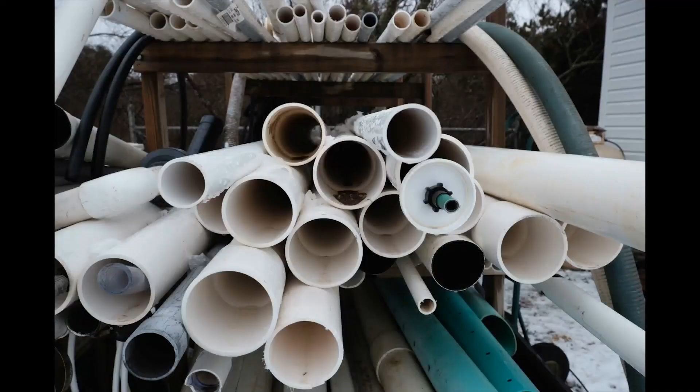Welcome to the Massachusetts Alternative Septic System Test Center, a division of Barnstable County's Department of Health and Environment. MassTC is the nation's premier third-party testing and research facility for innovative alternative on-site septic treatment technologies.

One of the most important ways that any septic system regulation can protect the public health is through the use of setbacks. Setback distances are designed to keep people and water resources a safe distance from potentially harmful wastewater. This training will focus on 5 setback categories: property lines, building foundations, wetland resources, water supply wells, and groundwater.

Our staff sat down with 3 practicing health agents to ask them about some of the details of setbacks in Massachusetts Title V and how they and their boards of health have handled certain situations.

My name's Bob Canning. I work for the town of Orleans, and I've been there for 37 years as its health agent. My name is Jane Crowley. I work for the town of Eastham. I'm the health agent, director of health and the environment. My name's Glenn Harrington. I've been the health agent at Mashpee 20 years, and I was an inspector 4 years before that in the town of Barnstable.

We've got 5 Title V setbacks we're going to talk about today: property lines, foundations, wells, groundwater, and wetland resources. Of the 5 setbacks, which one do you consider to be the most important, and what do you consider to be the least important? How would you rank them?

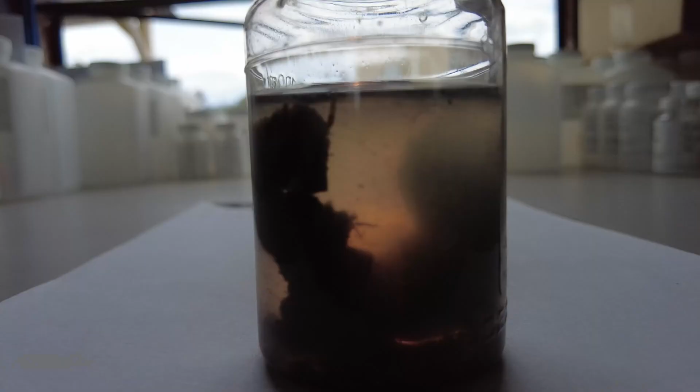Great. And then, so wells are first. What's the order after wells? I would say wetlands. Obviously, we have many sensitive receptors, and wastewater, even a small amount of nutrient loading, has a significant impact. So that is a critical concern in our community. We have many freshwater ponds, we have estuaries on either side. We're surrounded by water. So that is always a very important criteria that we are looking for.

Would it be accurate to say that property lines and foundations are the least important? Yes, I would say so. Clearly, we require, upon installation, a certified as-built with a land surveyor stamp. So the components are identified specifically on the lots. But I would say that of all the setback requirements, foundation setbacks and the property line setbacks are clearly on the lower end of the spectrum.

Because they don't affect public health as much? Yes, I mean, we can waterproof a foundation so that there is not horizontal transmission from the effluent. Property lines, we want to make sure that the effluent is discharged on site.

Also, you have to be considerate of the abutters. I think engineers do that as a matter of fact in their planning process. We don't want to negatively affect other people's site constraints. And by going directly up against the property line, you could create more of a hardship, I would say, on abutters. So engineers do a very good job of trying to stick with the 10 feet and, if necessary, going up to the 5 feet and getting the variance.

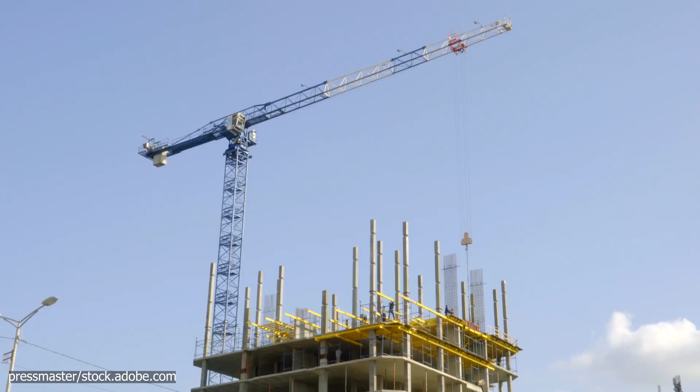So you should have some discretion on granting variances on a repair. Per Title V and the standard of review, you have far less discretion on new construction, and I think that's fine. They're starting a new project, and they would be creating the variance with their project. So I do think that two separate standards of review are a good idea.

I mean, new construction, your goal is full compliance, whereas with something pre-existing, you have to work within what constraints you're given. Whereas for repairs, you'll be more lenient on those setbacks. You just have to work to maximize the compliance that you achieve. I don't think there's any difference in the review, but there's definitely a difference in the mitigation.

Okay, so the standard of review is the same, but the mitigation can be different. Within Title V, there's actually a priority under maximum feasible compliance that the property line setback be requested first. Unfortunately, that doesn't happen all the time because the engineers and homeowners are looking to get the septic system approved and installed, because that variance requires, in most towns, a board meeting so the abutter notification can occur and the abutter has the chance to be heard at a public meeting.

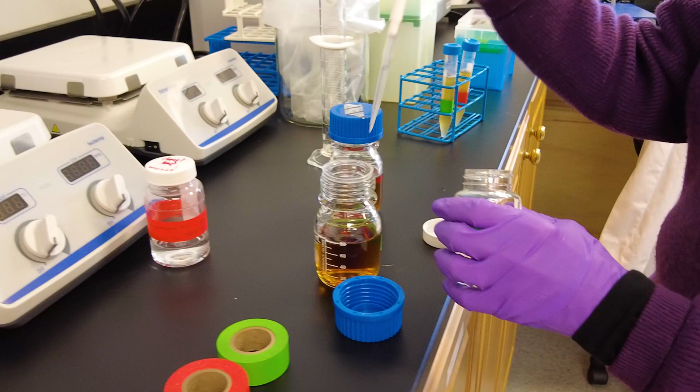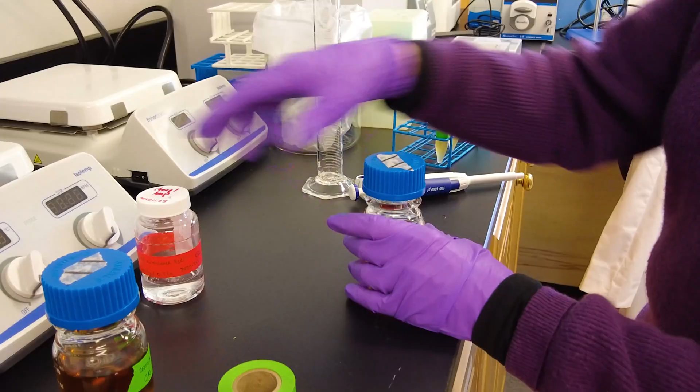So I'm guessing that a lot of your advice to your own board is know their own regulation and base all their findings and their direction on the regulation, not on some inappropriate protocol that was conducted. Right, they have to be careful not to deny things based upon a policy or a submittal protocol. The regulation really has the teeth of the law behind it. We're a science-based operation, so we need to be based on science. I would have to advise any board to work on the science and base their decisions on some study that's considered an industry standard, and not go too far awry from that, because the regulation would be considered arbitrary if it went beyond some industry standard.

What about those situations where you have a homeowner who's next door just doesn't want to see the property go in or doesn't want to see his neighbor enlarge the house? Do you come up with those situations where I don't want him that close to my property line, why should I let this happen, kind of thing?

We have had that situation, and many times there's ulterior motives that go along with that, where on the Cape we have visibility issues where one house is blocking another, and that's probably more where we come in. They use us as a tool to try to prohibit someone from doing that, but people have the right to use their own properties.

Granted, they can't force drainage onto another property, so you have to make sure the engineering and septic design is sound where you're not impacting the other property. But if it's an existing situation, the septic system comes first. You have to have a septic system for a property, and if you deny them that, you're looking at manifest injustice.

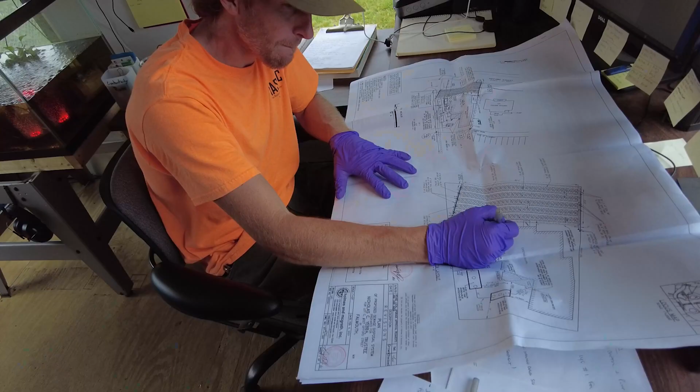So in the instance, say, of new construction, generally what we're looking for is full compliance with the code. And if somebody wants to deviate from full compliance, then they have the variance process to do that. However, in order to get a variance, an applicant has to demonstrate that the design with the variance will provide the same degree of environmental protection as without the variance, and also that denial of the variance would constitute manifest injustice.

Equal degree of environmental protection is difficult, but not necessarily insurmountable, particularly if you're looking at some sort of enhanced treatment system. However, manifest injustice is, I think, a much higher hurdle, because there is case law that has basically interpreted manifest injustice as depriving an applicant of all beneficial use of the property. And all beneficial use of the property is very broadly defined, such that if you can derive any use out of the property, even if it's, for example, establishing a birding stand, then you have beneficial use. And denial of a variance does not deprive you of that kind of beneficial use.

So standards for deviating from setbacks, regardless of what they are, for new construction, within a strict reading of Title V, is very, very difficult.

Now, with respect to the philosophy behind some of those setbacks and the reasons why they're in Title V: property line setbacks generally require a component to be 10 feet off the property line. Basically that is to ensure that there's no accidental encroachment of a system component on somebody's property line, and also to ensure that there is always going to be adequate separation between critical components. So if, for example, your soil absorption system is 10 feet off the property line and your neighbor's soil absorption system is 10 feet off the property line, that's a 20-foot separation. That is pretty much guaranteed as reasonable assurance that there's not going to be any sort of interaction between the two, that there won't be any sort of adverse impact because of proximity. That's a reasonable separation.

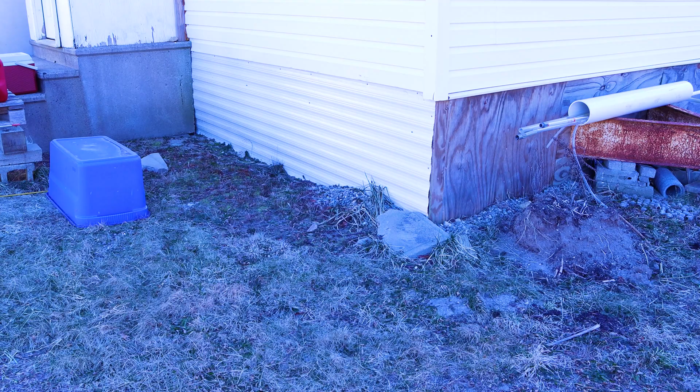Foundation setbacks are in place for a couple reasons. One, that you want to make sure that components are far enough away from a foundation so that if you ever have to go in, say, and replace a septic tank, that you're not so close to a foundation that that kind of excavation would in any way threaten the structural integrity of a building. Another reason, and this would be more applicable to soil absorption systems, is that you want to prevent any sort of horizontal migration of effluent that may get into a basement or any sort of living space.

In the Cape with sandy soils, that's probably not as much of a concern, because the vertical component of infiltration is much more dominant than the horizontal component of any sort of effluent flow. However, if you get into other soils in other parts of the state that may be more platy, then that horizontal constituent of infiltration may be more dominant than the vertical, and therefore you want to ensure that there is adequate separation so that you don't have any sort of infiltration into any sort of living space or basement.

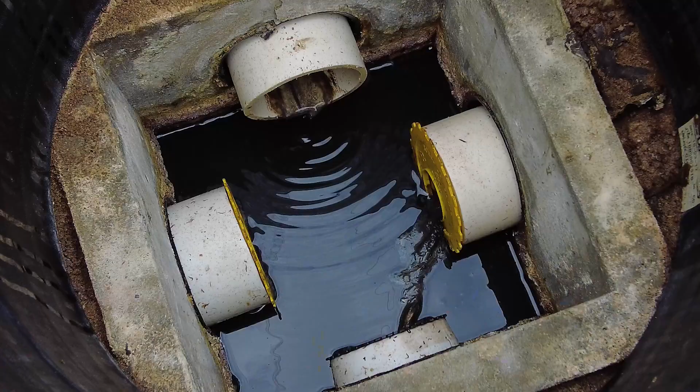And through the years, the existing 20-foot separation, say from an SAS to a foundation, is considered adequate for that purpose. And the 10-foot separation, say from a septic tank or any other chamber-type component, is sufficient for protecting the structural integrity, as we had mentioned at the beginning. So that addresses property lines, and it addresses foundations. I think another one that you were looking for was wetlands.

Yeah, wetlands and wells. But before we leave that, I've heard you refer to the other two as more administrative ones, that in repair situations are less critical. Could you speak a little to that, whether these are what you meant by administrative, or ones that are sort of less important? Well, I think the property line setback, as we said, is to ensure that there is sufficient separation between components of systems.

That is what you could loosely define as an administrative thing. It's not necessarily a critical environmental component, although I don't want to minimize the importance of having adequate separation between components. But that's a way of ensuring it without having to go in and check every neighboring lot when you do a plan review. If you're meeting that separation, then you should be okay.

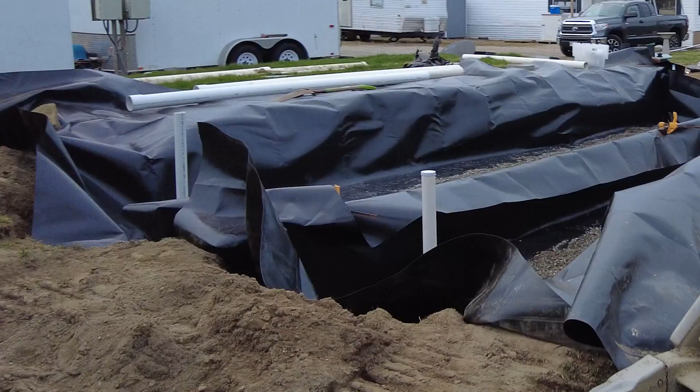But in a repair situation, they usually put up an impervious barrier, whereas in new construction, they could still put up a barrier, but they'd have that other hurdle to go over, which would be the manifest injustice piece.

Right, and with the revisions of Title V back in '95, we were looking to streamline how variances were reviewed and approved, because under the '78 code, we approved all variances, and everything that deviated from the code was a variance. So anything that the Board of Health reviewed and approved as a variance came to us for our secondary review and approval.

So in order to streamline things and keep it more within the local approving authority's realm of responsibility, we came up with the concept of local upgrade approval. Local upgrade approvals, or those things for repairs that are able to be administered under local upgrade approval, are listed in Title V.

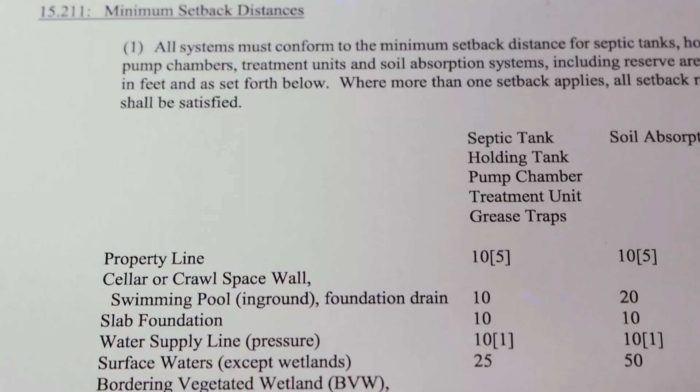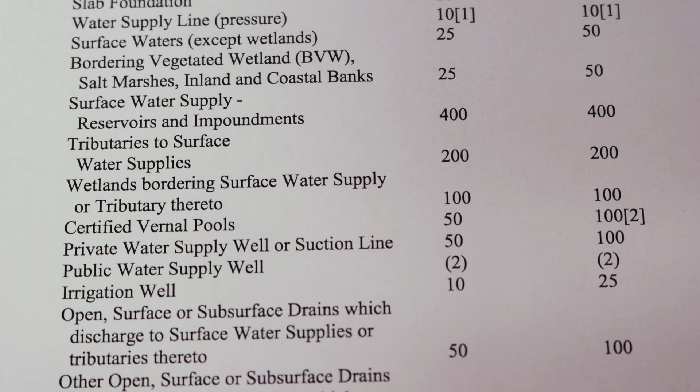And essentially, they are listed in hierarchical order. Those that are less critical are right at the beginning, like property line setbacks, like foundation setbacks. Those that become of greater concern with respect to public health and environmental protection are listed at the bottom.

So basically you're going through this, and then if you can't accommodate a fully compliant system, or a system as compliant as possible with some of - and I use the term less critical very loosely - some of the less critical deviations from the code, then and only then do you start looking at things like reduced separations to wetlands, or reduced separations to wells, or reduced distance between the bottom of the SAS and groundwater, or any reductions to naturally occurring pervious material.

So as we move off of those that are sort of less critical, we get into particularly wells and wetlands. Can you speak a little bit to why you believe those are in the code? What are the critical things that a Board of Health should look at when they're even thinking of varying those, or when they're reviewing plans and things like that?

Well, there are a couple schools of thought with respect to wetlands as to why those variances are there. One school of thought suggests that you're protecting the wetlands from the system. There's another school of thought that says you're actually protecting the system from the wetlands.

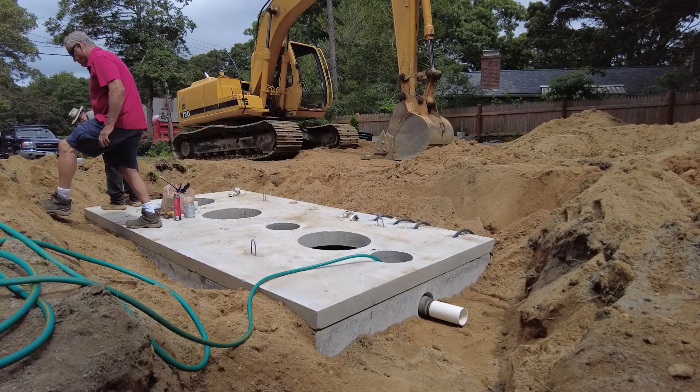And the thing about hydric soils is that they're not as amenable to a Title V system, because they're hydric, they're not unsaturated, they tend to be comprised of much more organic, loamy, silty material than what you would see in more traditional soil horizons.

So there may be an element from both sides in terms of why you have that. You don't want to have a lot of construction and excavation too close to a wetland, where you may be impacting it, so that's sort of a protective element. Depending upon site conditions, you also don't want it so close that you might risk effluent breakout within a wetland.

So in that sense, you're protecting the wetland from the system. Right, and in the other sense, in terms of appropriately siting the soil absorption system, you're protecting the system from the wetlands. So we're both right—it's protecting one from the other and the other from one.

So what about the well setbacks, which are set at 100 feet in Title V, but many towns have gone further than that? Could you speak to why the well setback exists, and if in some sandy soils it might be appropriate to increase that setback? Well, the well setback basically is a public health consideration.

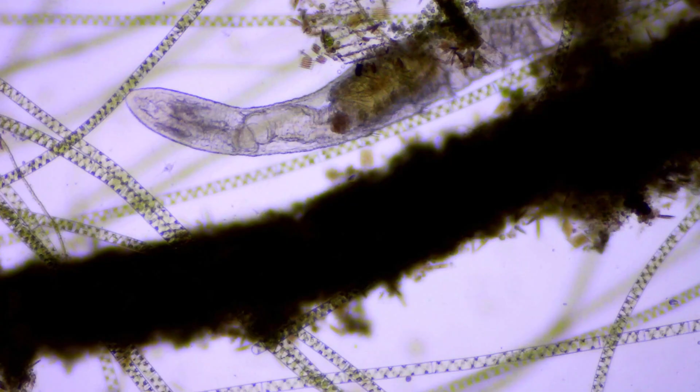I think it's protection primarily from pathogens, whether or not certain conservative constituents in effluent are diluted to any appreciable degree. If a well is immediately down gradient of a plume, that's debatable.

But the 100-foot setback from a well is primarily for pathogens, and that's been borne out. I think, I don't know if this is an apocryphal story or not, but when I first started with the department, the story went that under previous codes, even before the '78 code, the well setback had been 50 feet. There was a Cape town, relatively densely populated, that adhered to that 50-foot setback, and these wells were just popping up with bacterial contamination.

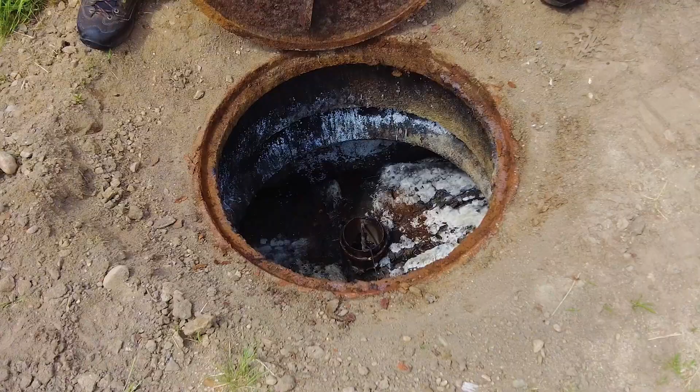That was tied to septic effluent. Now, it could have been that there were a lot of cesspools, so these were overloaded—you weren't getting adequate treatment, you may not have been getting adequate separation, there could have been a whole host of things. But the thing is, that did not seem to be an adequately protective separation, so it was increased to 100.

Over the years, that does seem to have held up as adequately protective for the typical constituents you'd look at, like coliform or typical bacterial tests. I know there's potentially some concern about viral transport because viruses may be able to last longer, but that's not something that's typically tested for. By and large, though, the 100-foot seems to be appropriate and adequate.

So when we're talking about setbacks, those are probably the more important ones—the ones that directly affect public health: viral transport to the well, or surface breakout that might contain viruses, which could then be exposed to anybody walking through the wetland, or pets that go there and come back into the home.

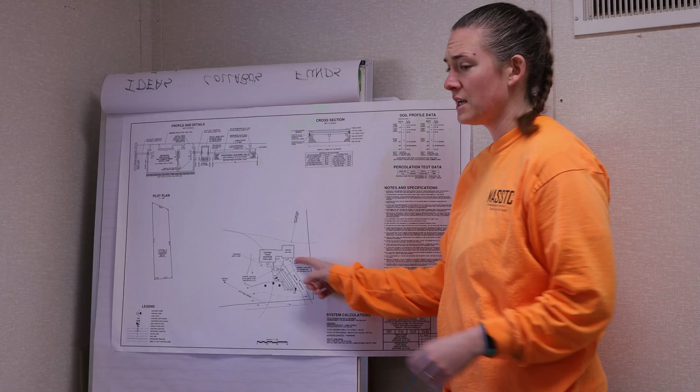Now, with local upgrade approval, the reason we've codified the kinds of reductions allowed is because we recognize you may not always be able to meet the same setbacks on an existing property, particularly one built before the '95 code. The reality is the '95 code requires bigger systems than just dropping a leaching pit in, as was allowed under the '78 code, which was probably the most common form of soil absorption system here.

So there has to be a recognition that not everybody is going to be able to meet full compliance, and the question becomes what are the reasonable reductions that you can allow, again following that hierarchy.

So if somebody comes in and says, I want 75 feet to the well, but they're putting their soil absorption system 35 feet from their property line, well, why can't you move that over 25 feet, get the 100 foot from the well, and get your 10 foot from the property line? Or if it's even tighter, why can't you move it within 5 feet of the property line and get 100 feet to the well? That's the thought process you want to look at: what's critical to environmental protection, critical to public health protection, and if you can't get full compliance with everything, those are the ones you want to strive to get. Even after everything else is considered, if you still can't get full compliance, maximize those separations as best you can.

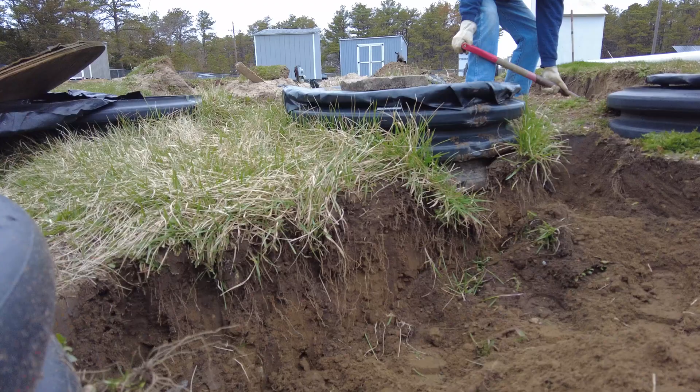And I think one of those probably would be like sieve analysis. I think another one probably is not increasing the depth of any component to more than 3 feet below grade. So I would say when you start looking at that list, you have to keep that in mind, and I think it's pretty evident where that cutoff comes.

You've got to apply some common sense too, as well. We all got into public health for one reason or another - whatever your reason may be, thank you for serving public health needs.

Well, I think we all have to do what we can to help steward the environment and protect what we have. Each person does that in their own way, and this, I think, was the way that I thought I could contribute.

In 1997, I got a job using my sanitarian's license at the time to get a job in Barnstable, the town of Barnstable Health Department. And so from '97 to now, I've been doing public health. I started as an inspector and now 20 years as an agent.